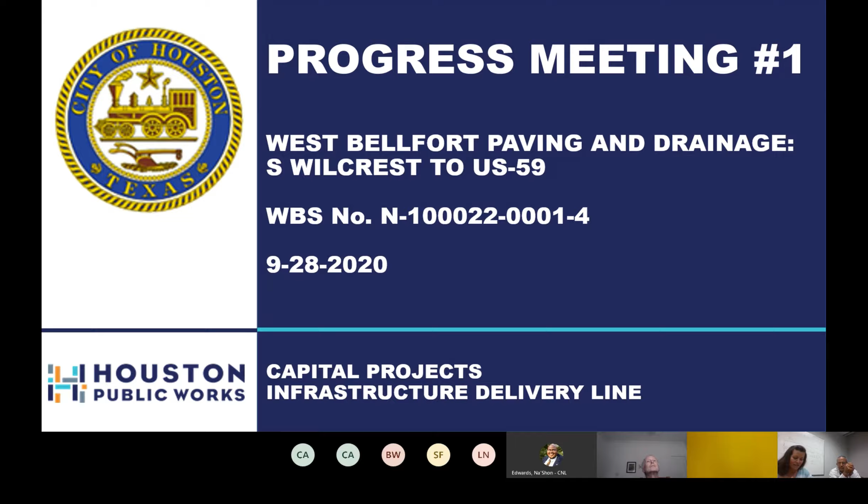Now, because this is our first progress meeting together, I would like for each of you to introduce yourselves briefly, just your name, title, and who you represent, so that we can stay on time. We can go in the order of the sign-in sheet shown on the screen, just to keep it organized and easy. Okay, cool.

Steve Campagna, I am the project manager for Public Works. And my name is Muhammad Warad, and I am helping here for the time being, and hopefully very soon Nancy will be handling this project. Because we're both retiring. No, don't be. Panic ensues.

I don't think Mohammed Safziri has joined. I'm not sure if he's coming. And I've already introduced myself. So, Claudius, are you on the line? Yes, this is Claudius, the senior inspector. Hey Claudius, hi. Sean? I'm Sean Felton, I'm senior inspector, City of Houston.

Okay, this is Sam Montoya, project manager for SER Construction. This is Ron Klein, I work with RS&H, and I am the EOR. I'm Byron Weaver, I work for Paradigm Consultants. We're the testing laboratory.

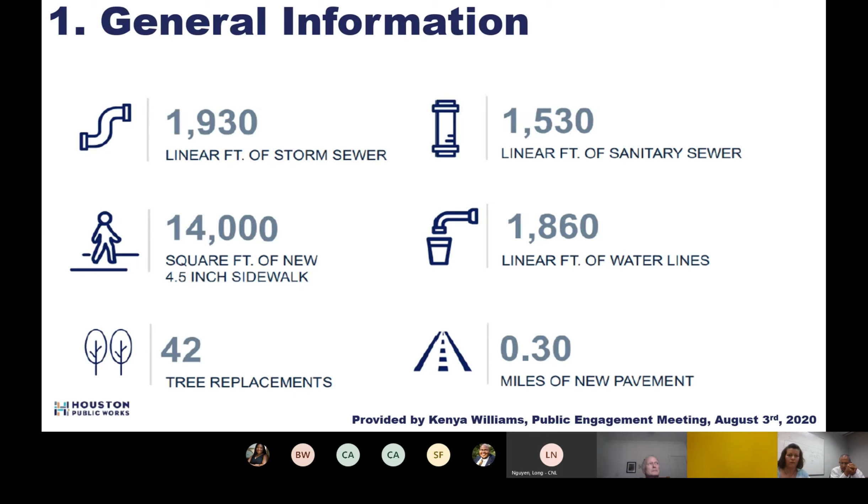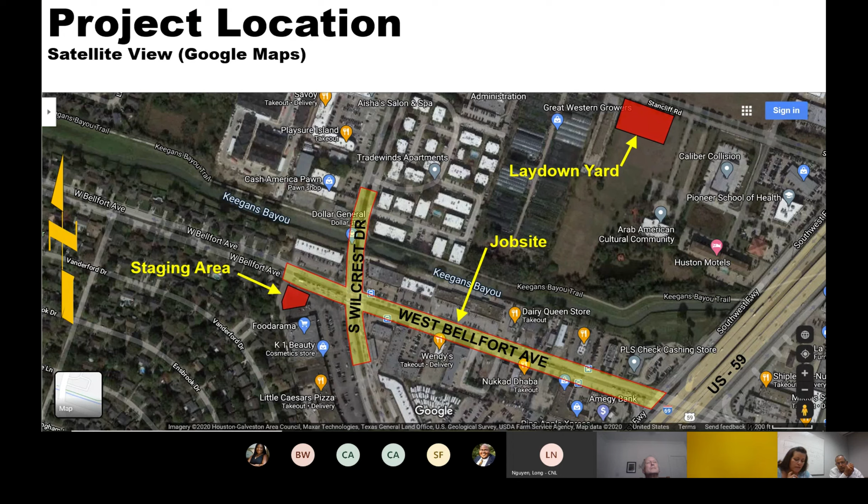Here is the project location. The job site itself is located on West Bellfort Avenue from South Wilcrest Drive to US 59. It's also located on South Wilcrest Drive itself at the intersection with West Bellfort. The laydown yard is located off of Stancliff Road, and there's a small staging area at the corner of the Foodorama parking lot.

This map was provided by RS&H. I overlaid it on top of the satellite image to show the different phases of construction that we're going to be doing. So the construction of this project will be completed in 6 phases, and currently we've already completed phase 1 during this last month of September, and we've begun on phase 2.

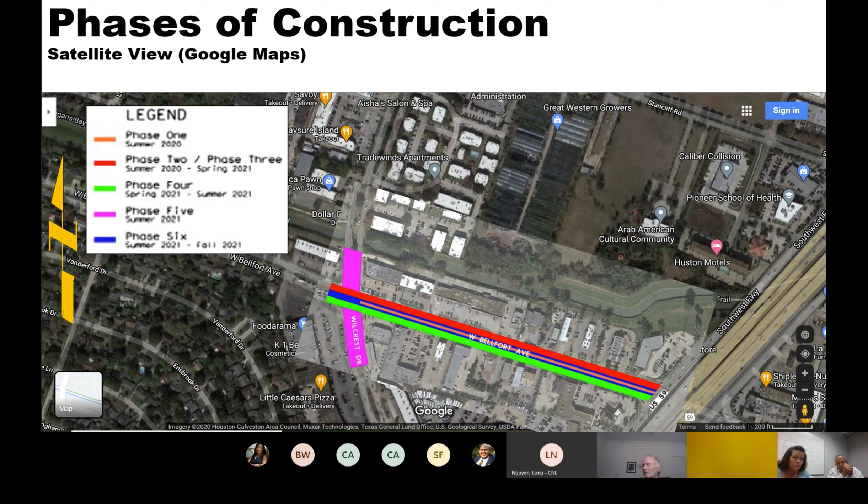Just to go over a few important numbers, the contract amount is $5,875,000 and some change. The contractor's total earnings to date as of this morning is $476,000 and some change. The percent in place complete is 8.1%. The contract time is 450 days. Today is day 42, and the percent complete by time is 9.3%.

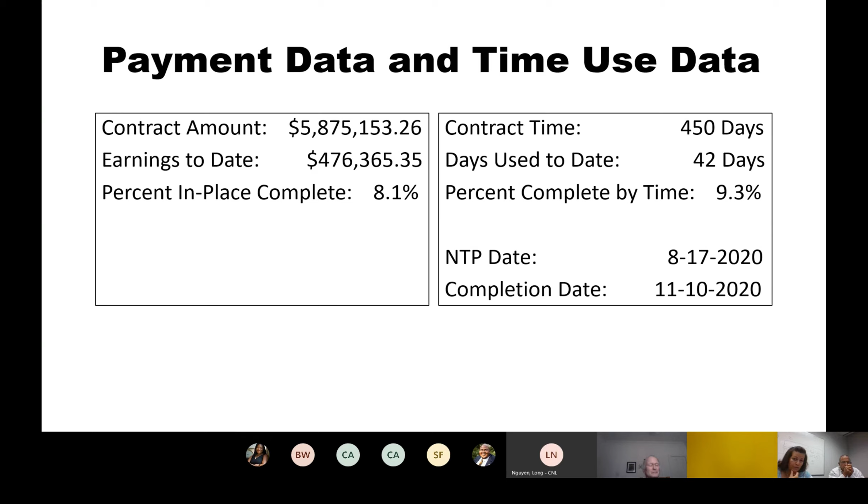Okay, next I'd like to share with you some photographs that were taken on the job site. This will help familiarize everybody with the location and the main activities that were accomplished, and that's especially going to be helpful for our guests who haven't had the opportunity to visit the job site. They'll help you visualize the construction work that's being done on the ground. And then after that, Sam will provide more details of the progress and any current issues in a few minutes.

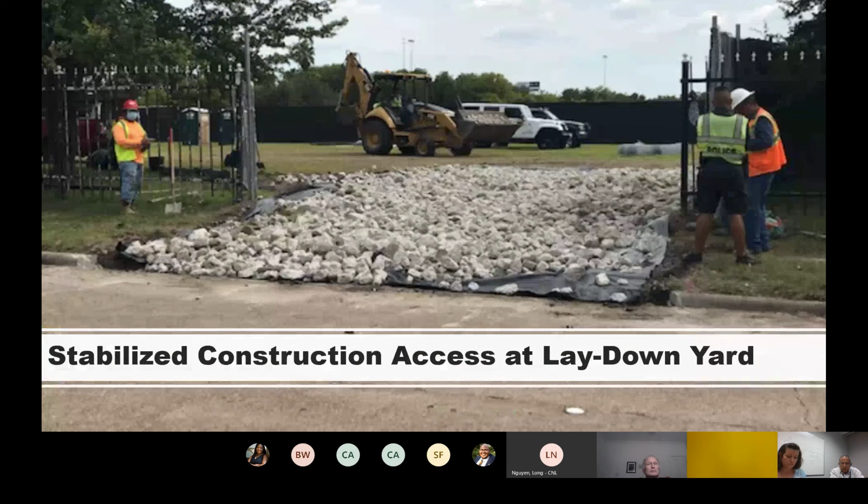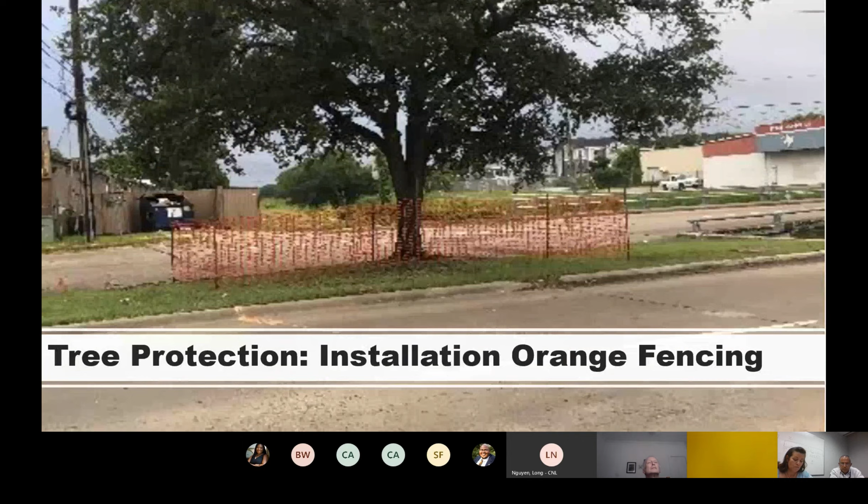But here we have the project sign, the laydown yard and stabilized construction entrance, filter fabric fencing, that's part of our SWPPP control, tree protection, and the tree removal activities that were performed before the demo work began.

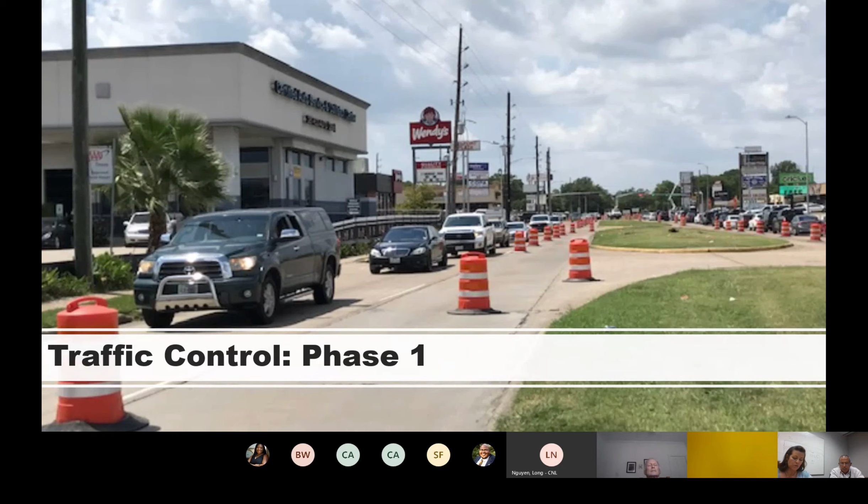There were 6 medians within the project job site that had to be removed. I've numbered them 1 through 6 just to make it easier to talk about. Medians 1 through 5 had vegetation, and median number 6 was made of concrete.

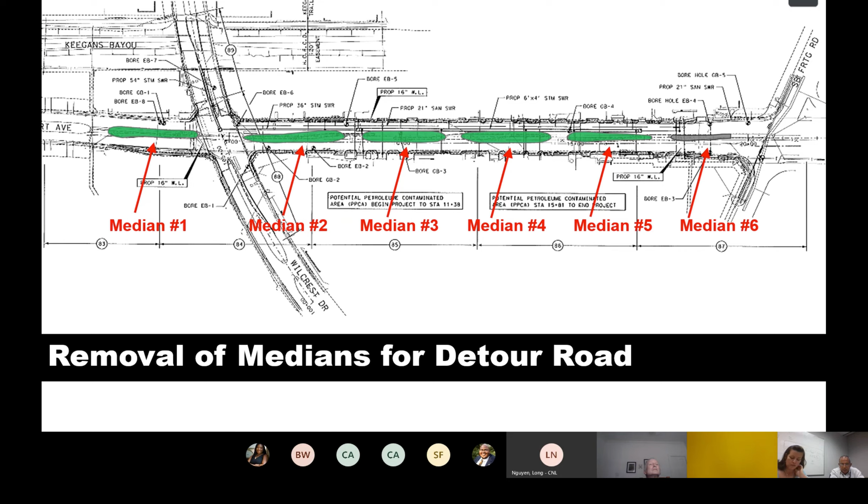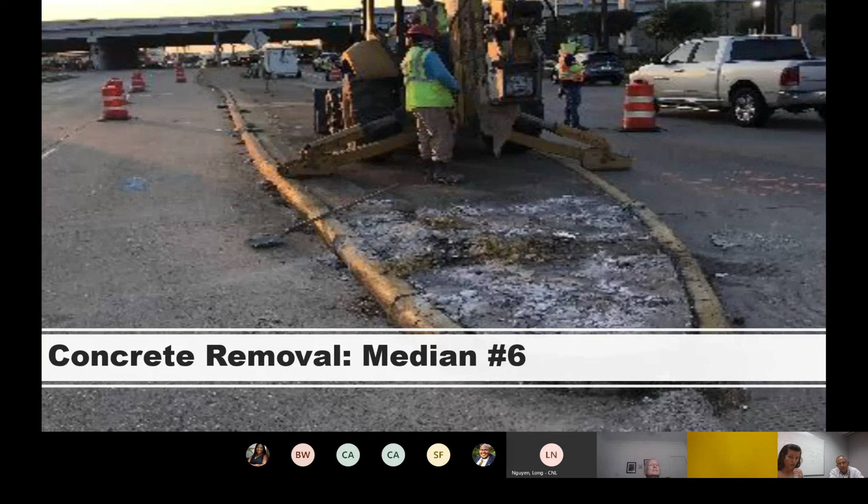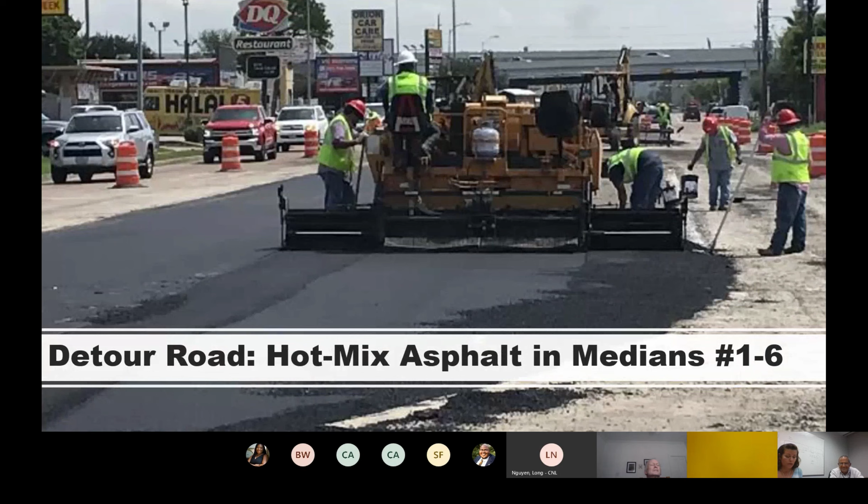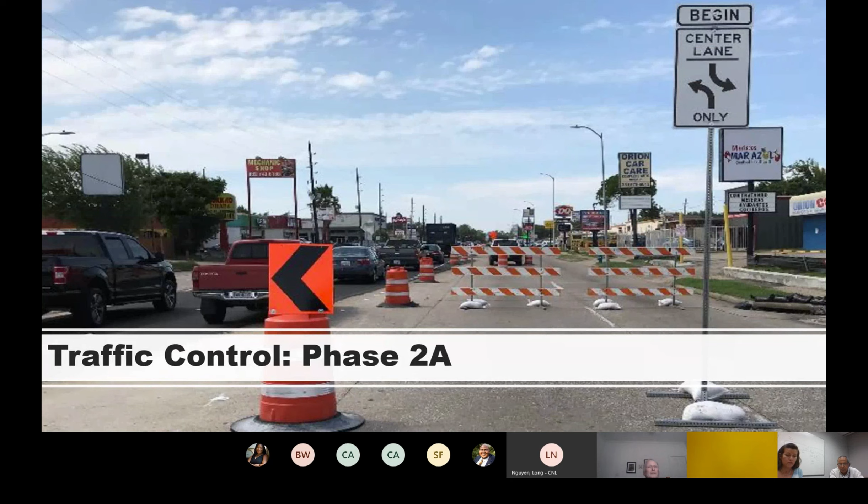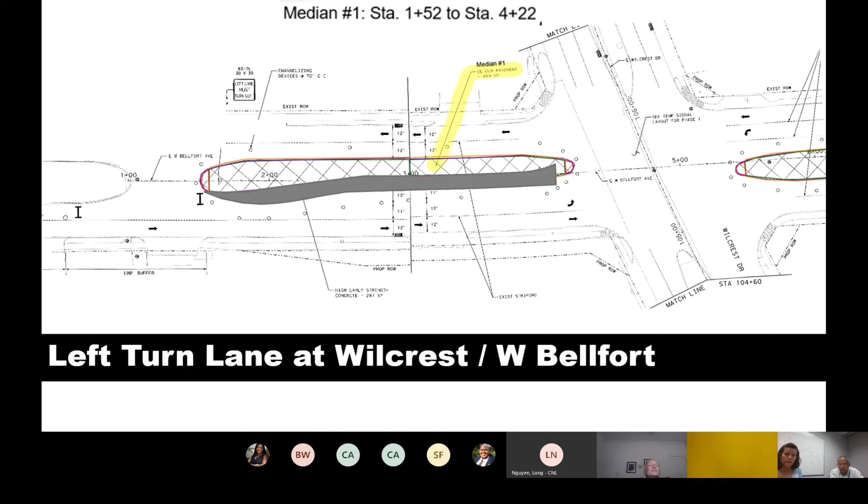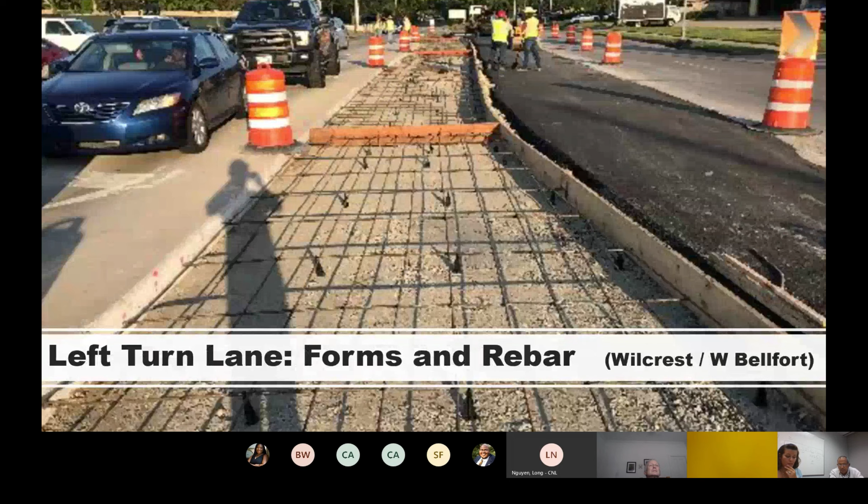There was also some reconstruction of the Wilcrest and West Bellfort intersection. A new left turn lane was installed on West Bellfort, as shown here in the construction drawings. This task involved saw cutting the existing pavement, placing and compacting the flexible base, setting up the formwork and reinforcement, pouring high early strength concrete for the left turn lane, and finally installing and activating temporary traffic signals at the intersection.

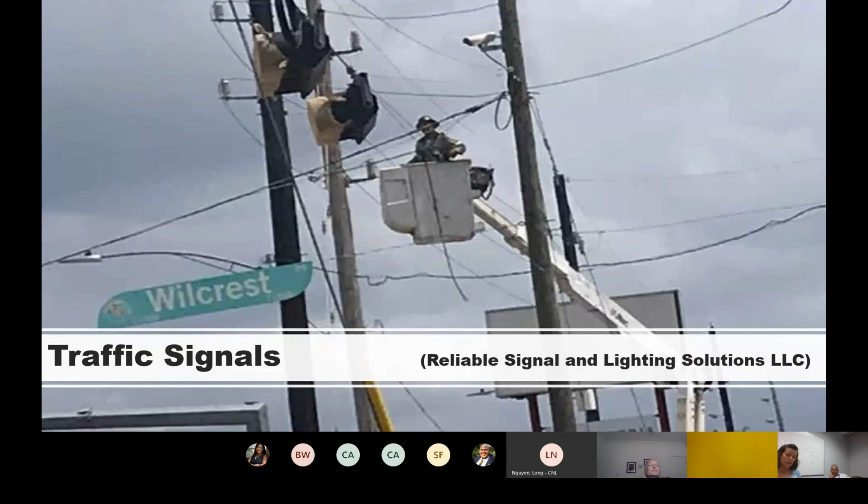Currently, SER is now installing 5x5 reinforced concrete storm boxes along the north side of West Bellfort, as well as sanitary sewer pipe and manholes.

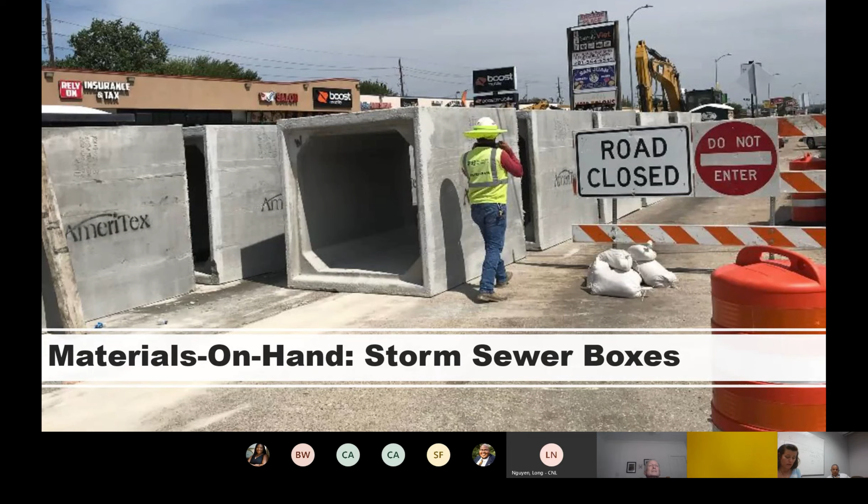I'll now hand it over to Sam to discuss any issues encountered during the construction and any other current work progress he'd like to talk about.

Okay, I guess this would be a good time to talk about the issue that we had with the 21-inch sewer going to 24-inch. I submitted an RFI. Is everybody up to speed on what happened and why it happened and what we're trying to do?

No, you can tell us briefly about the RFI number 4 and what the current issue is, because I don't think anybody... well, I think Sam talked to me on Saturday. I mean Stephen, Mohammed and I know.

Yeah, why don't you, Sam, real briefly, like a sentence or two, tell us what the issue is. Okay, that might be a little difficult, just a couple of sentences, but...

When we bid the job, it was apparent that 21-inch ductile iron pipe is not manufactured, so it was upsized at the bid. We took care of it then, no questions. Unfortunately, we skipped a detail when we ordered the manholes. We looked through all the submittals, made sure everything looked appropriate, but the upsize didn't happen there. So now we have 21-inch boots on the manholes, and we have to figure out a way to connect them. The way we've done that on several projects, and how I've done it over the years, is you can grout them in and put some hydrophilic water stop. That's what we're asking to do.

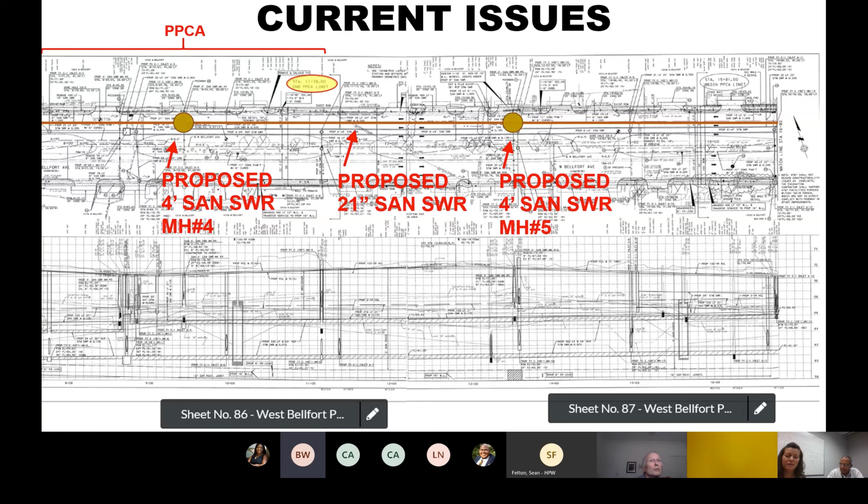Mr. Weaver, do you want to share with us the lab test results? So far, lab test results have come back good on everything.

We did have a request last week on Friday to do a cement stabilized sand 2-sack, but we only had a 1.5 sack and 100 PSI available. So whenever that occurs, we have to do a proctor. Until I get the proctor results back, I can't officially tell you the compaction on the cement stabilized sand they put in on Friday is good. I should have proctor results in today.

So if we're going to do a different soil or a different cement stabilized sand mix, let me know a couple of days in advance, and I can get out to either the pit or the plant and pull a sample, and we can get the proctor out. That'll give us faster turnaround on the soils testing.

And then I have a guy out there today, but they asked for him to be out there this morning, and he's essentially sitting around waiting for them to pump out water. So just to save the city money, if we can schedule a little tighter on that kind of thing, because I hate my guys just sitting around doing nothing on the city's dime, to be perfectly honest. But that's been the only issue, and we're getting going and things are moving along pretty well so far.

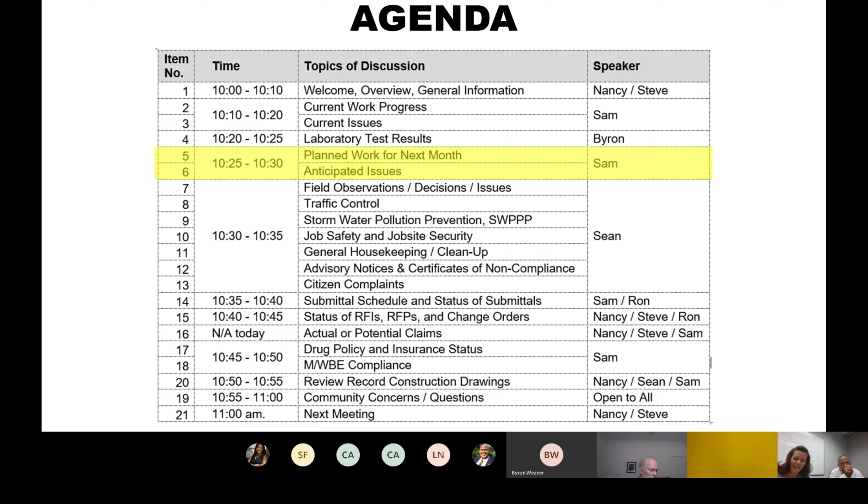Next we'll hear from our inspector on everything that's happening on the job site. One issue, the sanitary sewer, the existing sanitary sewer is clogged. I've called the city out, sent it to the app, and called them also. They haven't been able to make it out yet to unclog the existing sewer line.

The street is undermined over there where we installed the storm manhole. The plans call for a 1-foot saw cut, but the street is undermined, so we're going to have to take out more of the street on Wilcrest than what's called out on the plans. I saw the daily report said part of the street caved in. So we'll excavate more than was shown on the drawings.

No, the street didn't cave in, it was undermined, right? Unless it caved in this morning. What's the difference? There's no street left if it caved in. Right now there's just no dirt underneath the street. Okay, I understand, thank you. So, street undermined.

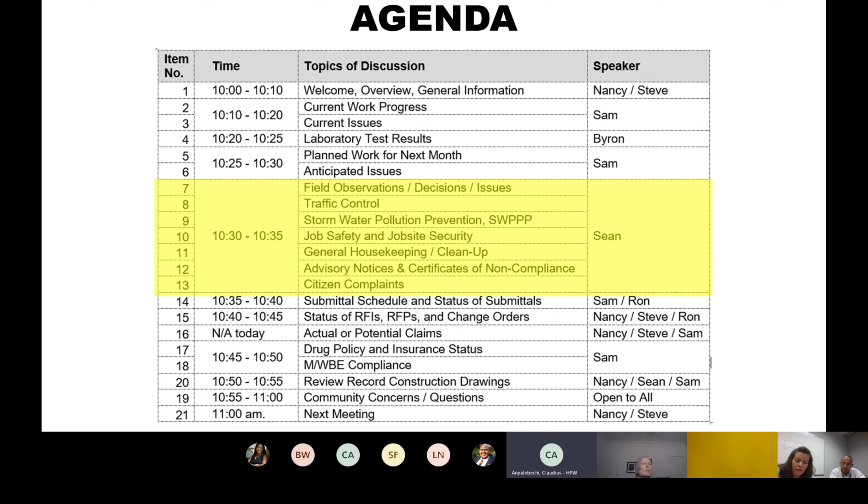Okay, I'll move on to the next section. Actually, we're doing pretty well, it's 10:33 and we're right on time.

So the next section is about the submittal schedule and status of submittals. I went ahead and looked at CIPMS this morning. These are the only submittals that have yet to be resubmitted, that were rejected and have yet to be resubmitted. But I'll let Sam and Ron take it from here.

Okay, yes, I am getting resubmittals from our signal contractor, Reliable Signal, and they gave me some late Friday, so I believe I have 3 to send in today. Other than that, I submitted the steel stairs and rail last week, and the 2-sack cement stabilized sand. Other than that, there's nothing else outstanding.

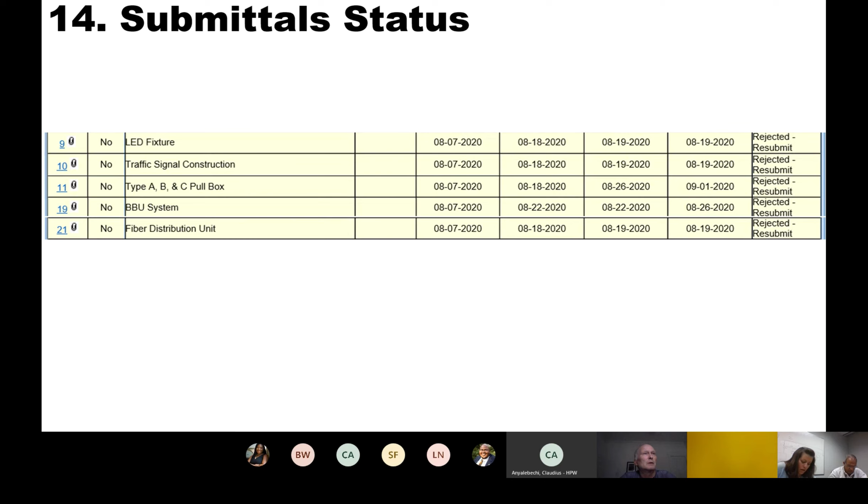Okay, wonderful. The steel stairs and rail I pretty much reviewed and uploaded this morning, and I'll get the 2-sack probably today, no later than tomorrow morning. Okay, cool, all right, good job.

Right along, okay. Status of RFIs, RFPs, and change orders. So here again from CIPMS, I just put together. We have 4 RFIs, 3 of them are closed, they've been addressed. The 4th one is the one we talked about earlier about the 21-inch DI pipe, so that one's still active.

We'll respond today. As far as RFPs, 1 RFP has been submitted to the city, it's pending review. RFP number 1, about substituting. Yeah, he did send something.

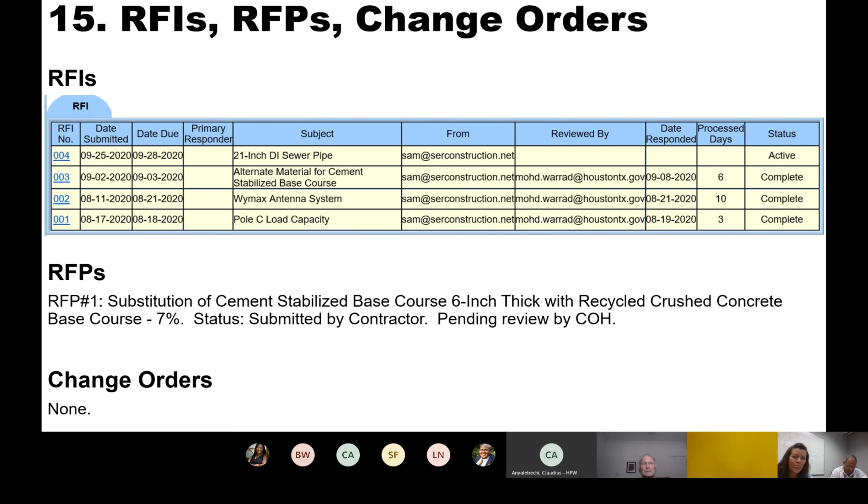Okay, we don't have any actual or potential claims, so I'm going to skip that.

Sam, you want to just give us a summary of drug policy dates, due dates, and insurance dates? Wow, I don't have that right in front of me, I believe everything is up to date. Okay, good. What about the MWBE compliance percentage to date?

Not with me, that's okay. I'm going to submit that very soon because the monthly documents are due for the upcoming pay estimate, so that'll be submitted very soon. I don't have that with me. I didn't understand that I should have had it here, I just didn't understand.

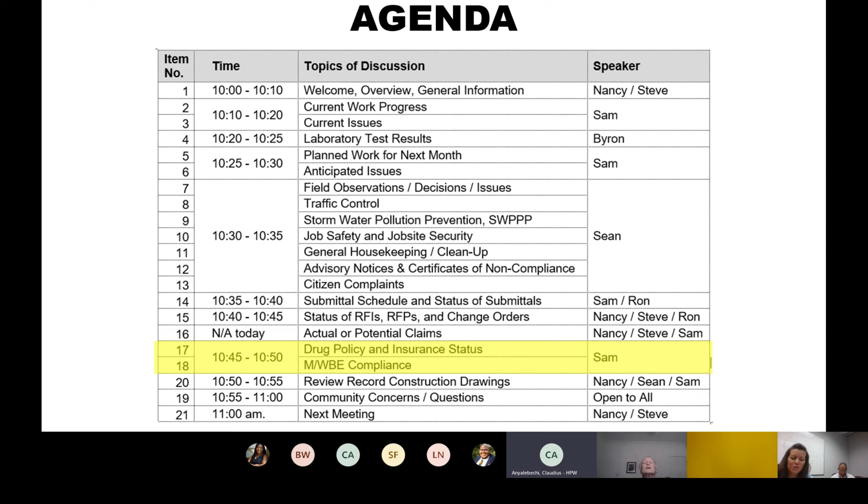Don't worry, this is our first meeting, we're working out all the kinks right now. It's okay, maybe in the future we should do our progress meeting the day after the pay estimate, just a thought. We'll think about that. Okay, so don't worry about it. Yeah, don't worry about it. Okay.

The next section is about reviewing the record construction drawings. This is doable because I have the construction drawings online, so I'm just going to put this up to a vote. If you want, I can pull up the drawings online and we can take a look, or we can take this offline after the meeting, it's up to you.

We can do it after the meeting. 15 minutes after the meeting, sure. Okay, that's fine, all right, so we'll talk after the meeting about the drawings.

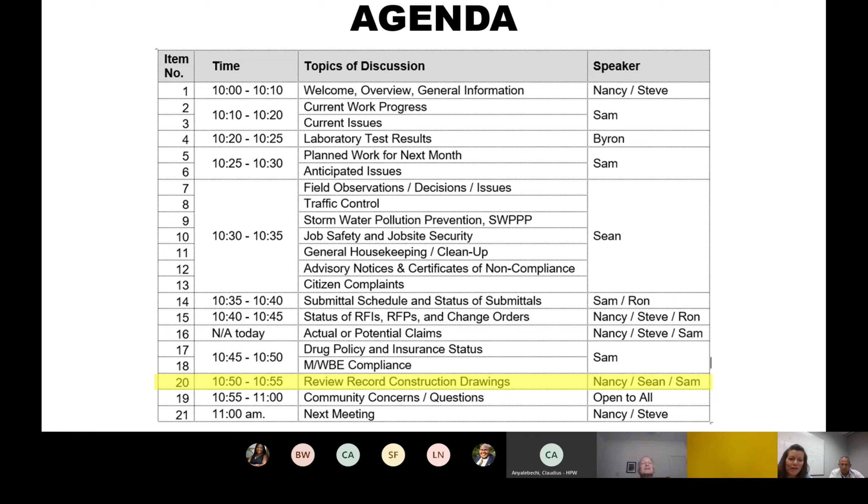Okay, all right, I'm gonna open it to everybody. Floor is open for anybody who has questions, other topics of discussion, community concerns, anything from District F. Any questions? Okay, I guess that's a no.

All right, I think we're good. It's only 10:38, so we're gonna hold the next progress meeting on the last Monday of every month, at 10 a.m. That sounds good with everybody. I'm gonna send out a recurring meeting invitation. Okay, thank you, Nancy.

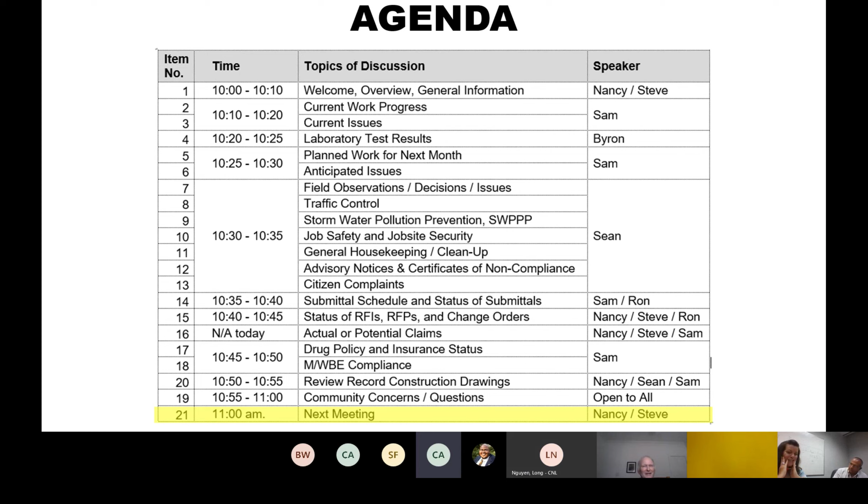Okay, good, all right, before we go I do want to say thank you to Ron Klein, because I asked a lot of questions and he was very patient.